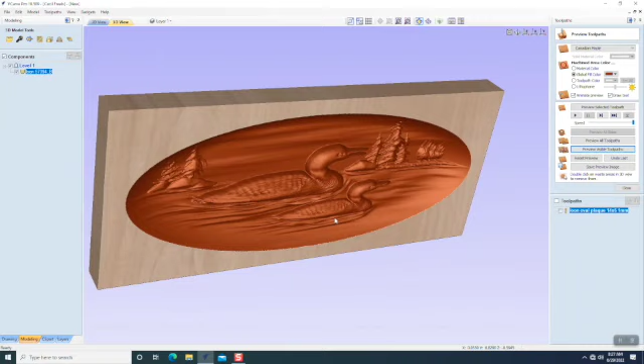Okay, now the last step is to close this. I'd ask if you're happy with it, but you can't talk to me, so I'll save it.

I use my CNC Shark, USB arcs, inches, wildcard, and then tap file. All these files are tap files, and you save it to your flash drive. See, it says this PC.

One of the things I like to do before I save this is come up here and save this file, because once in a while... I save it to documents, and I have a section called plaques, and right there I'll make a new folder, Loon.

So that I know inside there are the plaques that are Loon plaques, and this is an oval plaque, 14 by 6 inches. It's important that you save this stuff, because otherwise you'll have a hard time. Now if you notice, it's went back to the PC.

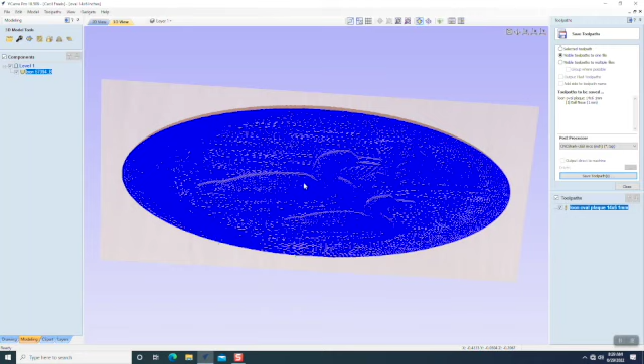Close this. If I turn this off, you'll be able to see it again, see my toolpath on and off. If I click on it, it should highlight it a little better. Ooh, moving it around.

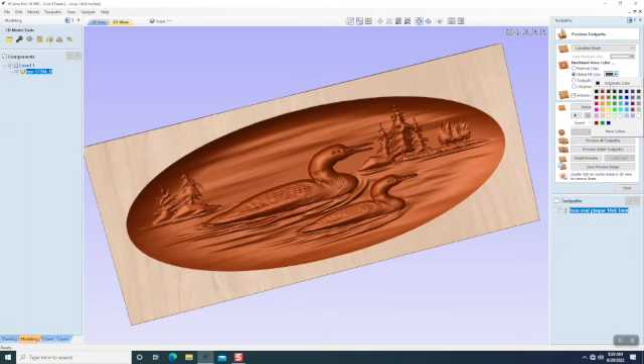Let's just go over here to preview. There we go, and you can do these in colors if you'd like. Do a green, light green... ugh, it's not very good. Let's check more colors, look at the color palette, let's go into that green right there. That doesn't turn out that well, but gives you an idea.

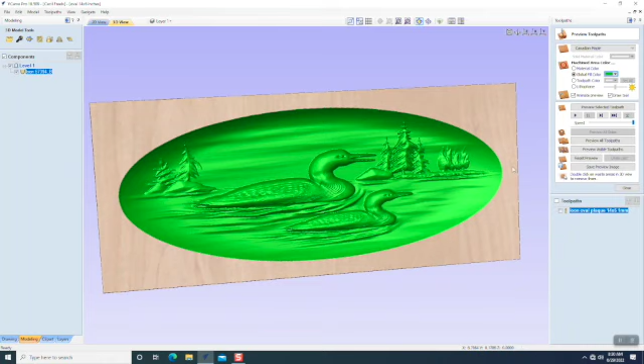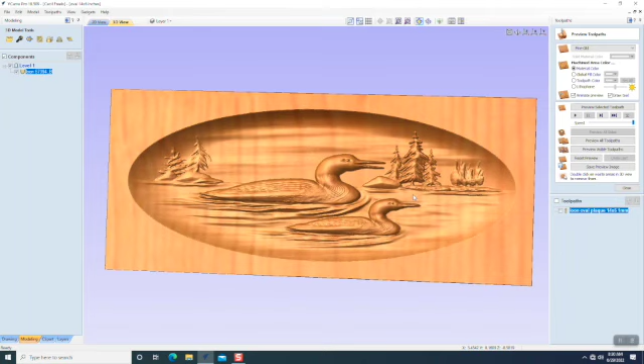If I click that off and make it the material color, you'll be able to see - and that's maple. What I'm going to be using is pine, so let's go find a pine. It's going to be an old growth pine. My pine, the grain runs the other way, and maybe if anybody knows how to do that, send me a note - just change the direction of the grain. That would be really nice to be able to do. Old growth pine is what I have, so it looks like that. It's not really old growth, it just has wider spacings, but I think natural looks better, see the waves on the water as they're traveling.

I get all my models from Design and Make. It's the company that actually makes Vcarve - it's a spin-off company that makes the software. This model I think costs $25 or $35, I don't remember which, but you can use it as many times as you want. You can't give it away, obviously - that would be violating the copyright - or sell it. I don't do either of those, but I do teach with them.